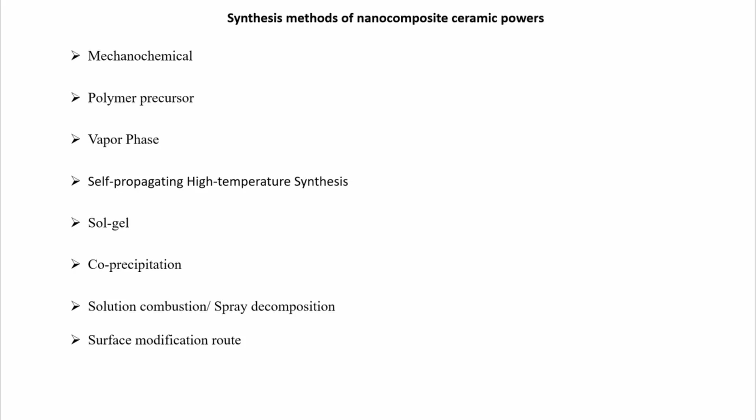Advanced Ceramic Nanocomposites. Lecture 2. Synthesis of nanocomposite ceramic powders. In this lecture, we will discuss the next synthesis methods of nanocomposite ceramic powders: mechanochemical methods, polymer precursor methods, vapor phase methods of synthesis, self-propagating high-temperature synthesis, sol-gel synthesis, precipitation, solution combustion, spray decomposition methods, and surface modification routes.

The simplest method to make nanoparticles in the form of powder is milling. Planetary, vibration, rod mills; one controls the speed of rotation and duration of milling to grind material to fine powders. Some materials like tungsten, cobalt, chrome, etc. are made nanocrystalline using a ball mill.

Most ceramic composite powders are currently synthesized via mechanochemical mixing of their constituent phases. These methods involve a meticulous selection of raw materials with a keen focus on factors such as primary particle size, size distribution, agglomeration degree, and purity. The attainment of high purity powders is imperative to circumvent the formation of secondary phases during the sintering process.

A broad particle size distribution, while leading to higher packing densities in green bodies, poses challenges in controlling microstructural development during sintering. This is due to the potential coarsening of larger grains, including smaller ones. Furthermore, the particle size plays a crucial role in determining final grain size and densification rate. As the particle size decreases, the specific surface area increases, consequently enhancing the densification rate.

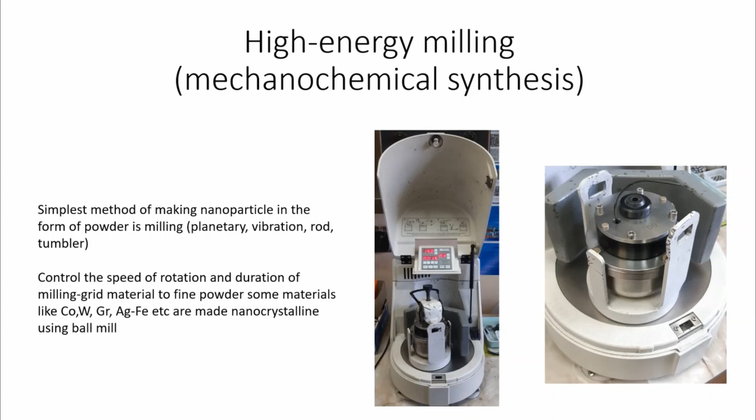As mentioned, mechanical milling is the easiest way to obtain nanomaterials and dispersed materials. One variation of this method is mechanochemical synthesis, when mechanochemical reactions take place. Mechanochemical synthesis involves the effective mixing of reactants through ball milling, either without or with only a minimal amount of solvents. This approach not only ensures efficient synthesis but also conserves energy and time. Consequently, mechanochemical processing is esteemed for its environmentally friendly or green nature.

Mechanochemical synthesis involves high-energy milling techniques and is often conducted under controlled atmosphere. It has been successfully employed for complex compositions and for materials like aluminum oxide reinforced with intermetallic compounds. This method is versatile, enabling the preparation of composite powders for oxide, non-oxide, and mixed oxide, non-oxide materials.

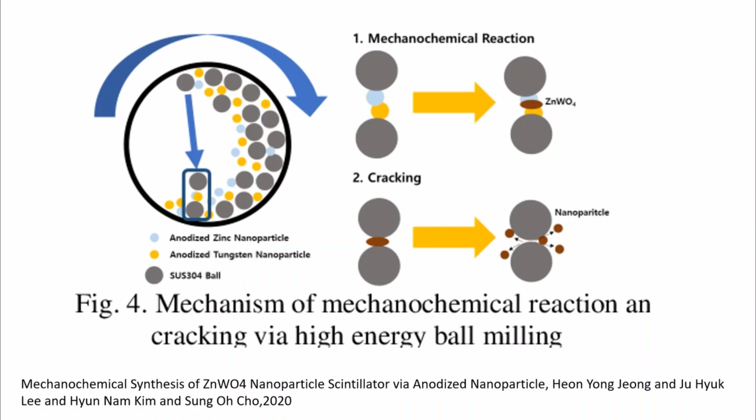According to fracture mechanics theory related to high energy milling, milling can produce fragments in the range from 5 to 100 nanometers. However, it's uncommon to observe particles as small as 100 nanometers in ceramic milling tests. Instead, larger particles containing ultrafine grains are typically generated. Additionally, in situ localized phase transformations have been observed in response to localized demand during milling.

Despite its advantages, mechanical synthesis has drawbacks. It struggles to produce discrete nanoparticles in the finest size range, and there is a risk of powder contamination from the milling media, especially with extensive and repeated milling cycles.

Mechanical synthesis methods are solid-state processing that constitute an alternative to those based on the use of liquid solvents. Mechanical methods have potential for industrial use as they are simple, scalable, and environmentally friendly. The solid-state reactions in mechanical synthesis can be used to obtain nanoparticles with small size and well-controlled crystallinity at very low cost. Herein we report on the mechanical synthesis of titanium oxide.

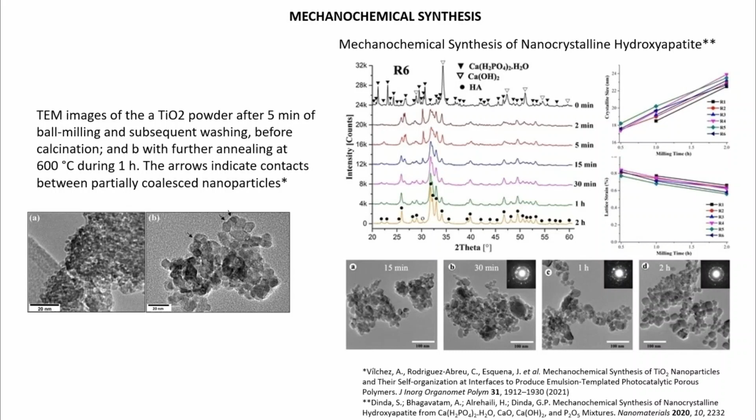The next technique to produce nanopowders with different structures is solution combustion synthesis. Popular bottom-up techniques are the wet chemical procedures such as the solution combustion synthesis technique, solution-based hydrothermal and solvothermal methods, or polyol synthesis methods.

However, the production of different nanostructures on a large scale through these techniques is currently limited due to the difficulties in controlling the properties of the bulk materials and the utilization in some cases of non-environmentally friendly chemicals. Additionally, the high temperature synthesis of some metal oxides makes this procedure expensive at industrial scale.

The solution combustion synthesis technique is a relatively new material manufacturing method, accompanied by robust high temperature and self-sustained exothermic reactions that make this technique a highly energy efficient process. Herein we summarize the surging popularity of solution combustion synthesis techniques. This method employs a homogeneous aqueous mixture of precursors followed by condensation to form a hydrogel containing a homogeneous metal cation network.

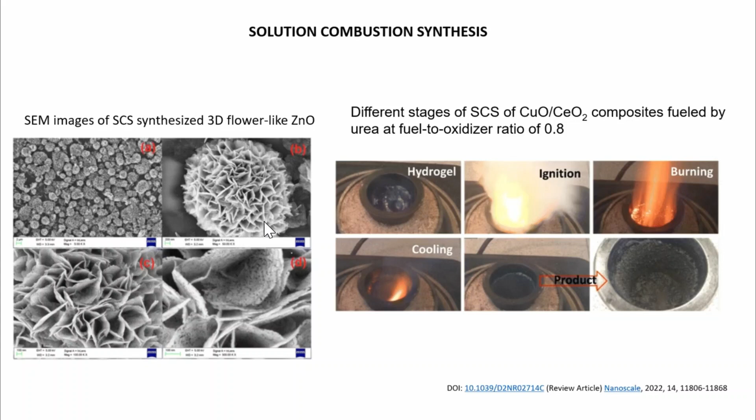In subsequent steps, as you can see on this picture, different nanostructures could be synthesized using these methods, like nanoparticles, nanoplates, etc.

The next one is the polymer precursor route. Polymer-derived ceramics are an alternative to conventional powder-based ceramics. Here, a pre-ceramic, mostly silicon-based polymer, for example polysiloxane, polysilazane, or polycarbosilane, is used as starting material. The cross-linked polymer can be transformed into a ceramic material by controlled thermal decomposition.

Treatment, so-called pyrolysis. The first step concerns the preparation of polymeric precursors, so-called pre-ceramic polymers, by incorporating the desired chemical groups. A second optional step consists in shaping the polymer via different techniques, as listed in this slide, depending on the target ceramic shape which has to be given. Sacrificial templates may be used during this shaping process to develop the porosity in the final material.

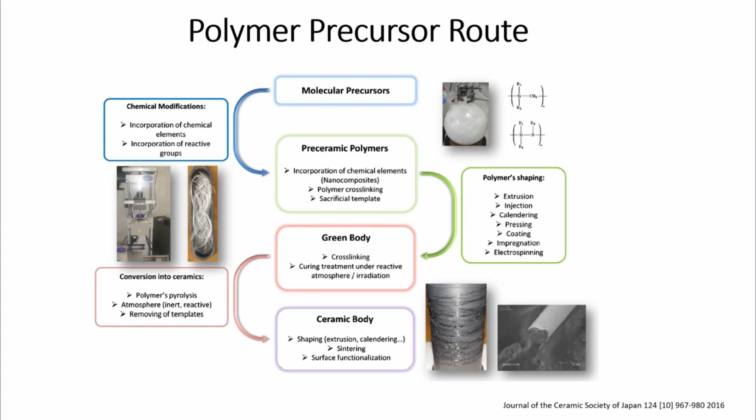Here you can see some examples of nanostructures obtained via the polymer precursor route. For example, pyrolysis of polymer precursors was performed under nitrogen atmosphere at 1400 centigrade, resulting in the formation of silicon-boron carbonitride fibers. These fibers were obtained by Bernard and colleagues via the polymer precursor route. These fibers, with an average diameter of about 23 micrometers, were obtained by this method.

The fibers exhibit a tensile strength around 1.3 GPa and Young's modulus around 172 GPa. The ceramic fibers retained their amorphous character until 1700 centigrade. And using these techniques, it's possible to obtain not only micron-size materials, but materials with much lower size.

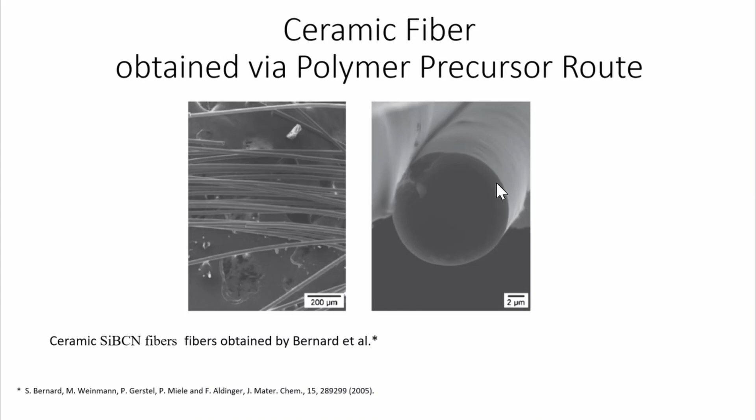For example, using this technology, it's possible to form composite fiber nanomaterials. For example, we in the Frantsevich Institute of Materials Science in Ukraine synthesized silicon nitride nanofibers as an intermediate product for producing composite materials: silicon nitride nanofibers covered by titanium nitride nanoparticles as an intermediate product for producing titanium nitride.

Previously, we synthesized on the silicon nitride fibers the oxyhydroxide of titanium in the presence of urea. Titanium oxyhydroxide that was obtained by thermal hydrolysis of titanium chloride in urea solution is placed on amorphous silicon nitride fibers. After the nitriding step in ammonia flow, we can cover the silicon nitride fibers by titanium nitride nanoparticles.

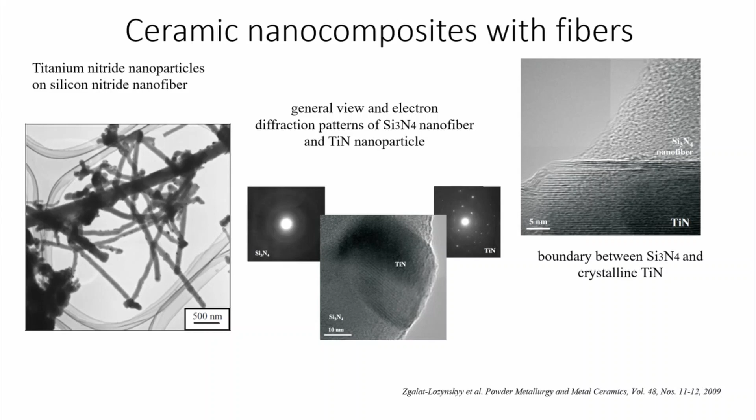The next method of synthesis is so-called gas-phase processes. One of these processes is plasma chemical synthesis. Gas-phase processes are environmentally benign as they are not connected to liquid effluents. The cleaning of liquid effluents is difficult and costly.

In addition, because the synthesis of nanopowders is in most cases connected with a low concentration, the amount of solvents needed in processing is huge. Powder synthesis based on reaction in a gas phase is based on a purely random process for particle formation. In general, this leads to a broad distribution of particle size and, in some variants of these processes, to the formation of particle clusters.

There are applications where broad particle size distribution and clustered particles are disadvantageous. To solve these problems, many process variants and nuances in processing were developed. A broad group of gas-phase processes is connected to plasma. A plasma containing particles is called dusty plasma. Particle synthesis is always connected to a dusty plasma.

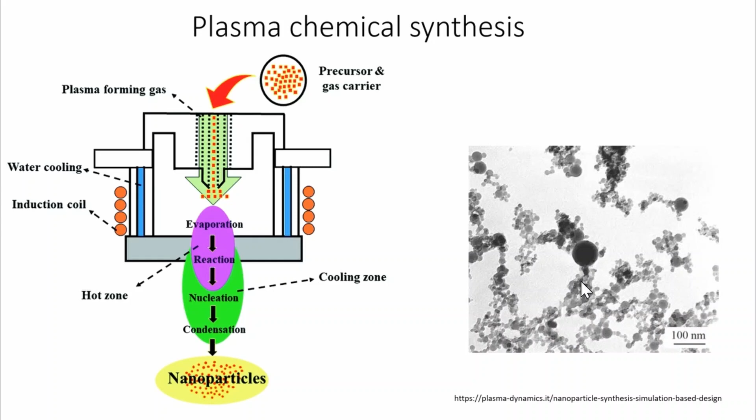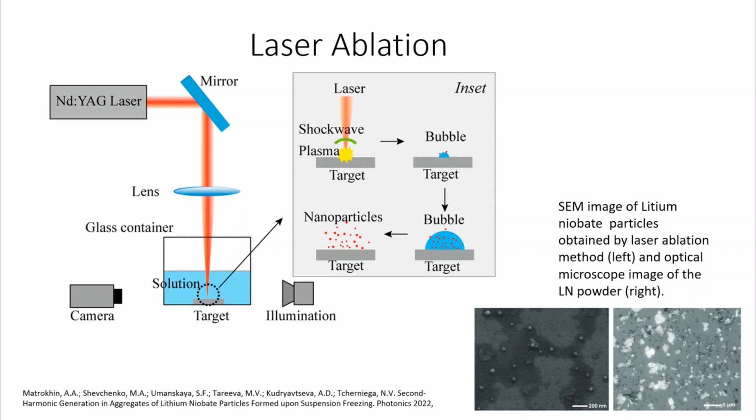The next technology to synthesize materials is the self-propagating high-temperature synthesis method. Using this method, it's possible to proceed with controlled combustion synthesis, and it is now utilized extensively in many countries. But being relatively new, it will be briefly introduced here.

Self-propagating high-temperature synthesis exploits a highly exothermic solid flame reaction between powder components to produce a large range of unique materials by controlled high-temperature combustion. It was first introduced by Merzhanov in 1967, but only later did it become worldwide, at the end of the century.

Using self-propagating high-temperature synthesis, the composition, structure and properties of the material can be tailored to satisfy requirements of many applications. Initiation of combustion takes place either by a chemical route or an electrically heated element. Once initiated, combustion is self-sustaining and proceeds by a combustion wave sweeping through the compacted material from the initiation side to the opposite side, and is completed in a time of a few seconds to a few minutes.

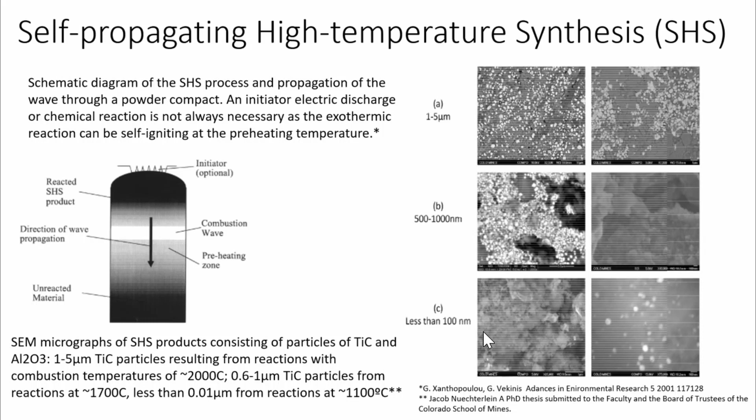The next very popular technology is the sol-gel process. It's a more chemical method, a so-called wet chemical method, for the synthesis of various nanostructured, especially metal oxide, particles. In this method, the molecular precursor, usually metal alkoxide, is dissolved in water or alcohol and converted to a gel

by heating and stirring, by hydrolysis or alcoholysis. Since the gel obtained from the hydrolysis or alcoholysis process is wet or damp, it should be dried using appropriate methods depending on the desired properties and application of the gel. For example, if it is an alcoholic solution, the drying process is done by burning alcohol.

After the drying stage, the produced gels are powdered and then calcinated. The sol-gel method is a cost-effective method, and due to the low reaction temperature, there is good control over the chemical composition of the products. The sol-gel method can be used in the process of making ceramics as molding materials and can be used as an intermediate between thin films and metal oxides in various applications.

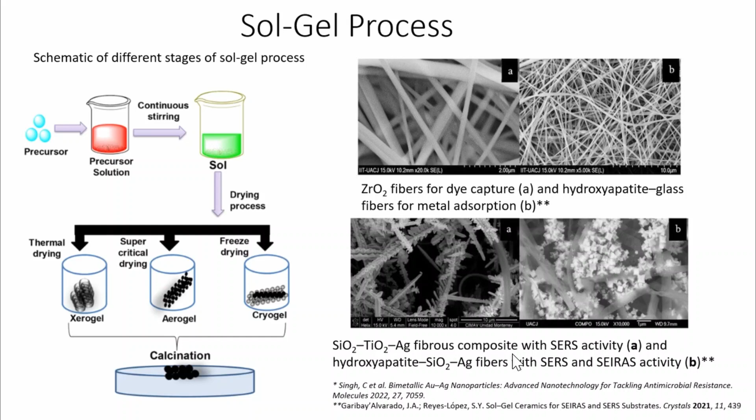The next technology is the dissolution method, so-called the co-precipitation technique, which is becoming increasingly important to distribute material and precursor used in reaction to produce required materials. The aim in so-called co-precipitation is to prepare multi-component material through the formation of intermediate particles, usually hydroxides and oxalates, so that an intimate mixture of components is formed during the precipitation, and chemical homogeneity is maintained

on calcination. In the typical process of co-precipitation, aqueous metal salts are mixed at sufficient temperature with a base, which acts as a precipitating agent. This method is widely employed in synthesis. However, in a few cases, the process is performed under inert atmosphere.

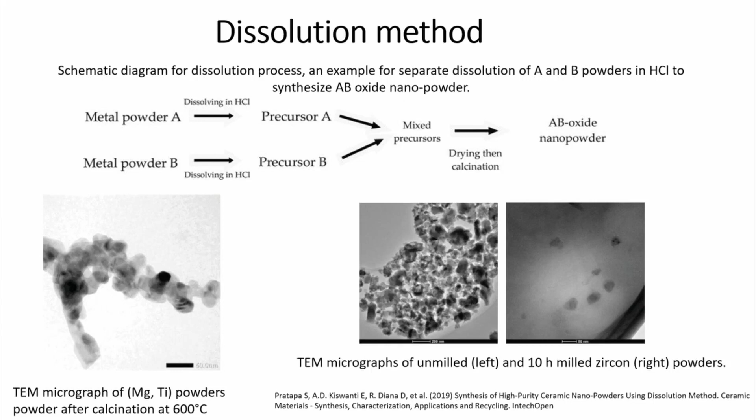And the last one is the so-called ion implantation method of nanoparticle synthesis. Ion implantation is a material surface modification process by which ions of a material are implanted into another solid material, causing a change in the surface physical and chemical properties of the material.

Ion implantation was developed as a method of production of p-n junctions of photovoltaic devices in the late 1970s and early 1980s, along with the use of pulsed electron beam for rapid annealing. Also, pulsed electron beam for rapid annealing has not yet been used for commercial production. Ion implantation is not used in most photovoltaic silicon cells. Instead, thermal diffusion doping is used.

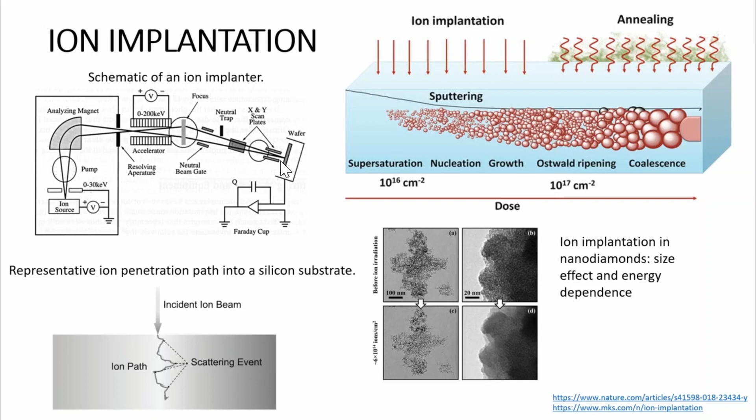In addition to the presented methods of synthesis of ceramic nanopowders, there are other methods you can find in literature. Sometimes there are solutions for the synthesis of nanocomposite powders involving several methods, or even innovative ideas on how to produce desired nanopowders. The main task at this stage is the synthesis of powder of necessary dispersion and scale with orientation towards the further application of consolidation methods.